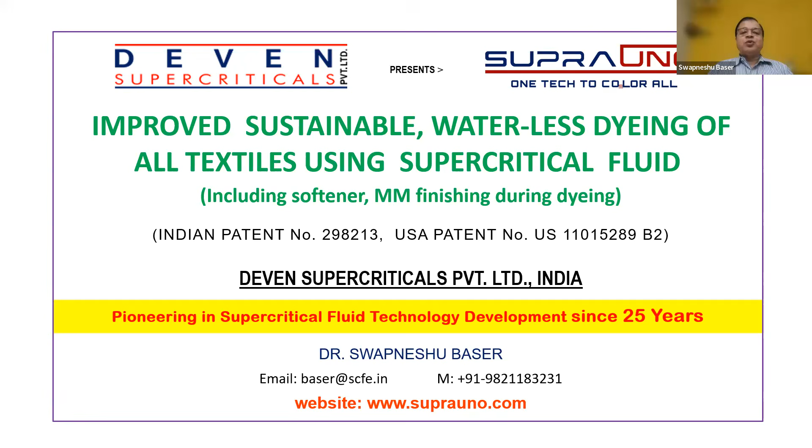Our company, as it was just told, is called Deven Supercriticals. So as you can see from our title, it has supercriticals in its name. We have been dedicated in the area of supercritical fluid commercially for the last 25 years, and on the research front, I have personally been involved for the last 30 years doing supercritical fluid processing applications and turnkey projects.

Deven Supercriticals is an innovation-driven company dedicated to world-class supercritical fluid processing for more than 2 decades. We are a spin-off company out of IIT Bombay, established in 1998, and we offer turnkey projects from pilot to commercial scale for various applications of supercritical fluids.

In the last 25 years, we have supplied around 26 plants, from small to big, in India and abroad, even to Europe, on commercial scale for other applications of supercritical fluids. And as mentioned, we have been granted a few international patents on different aspects of supercritical fluids, and dyeing of textiles is one of them.

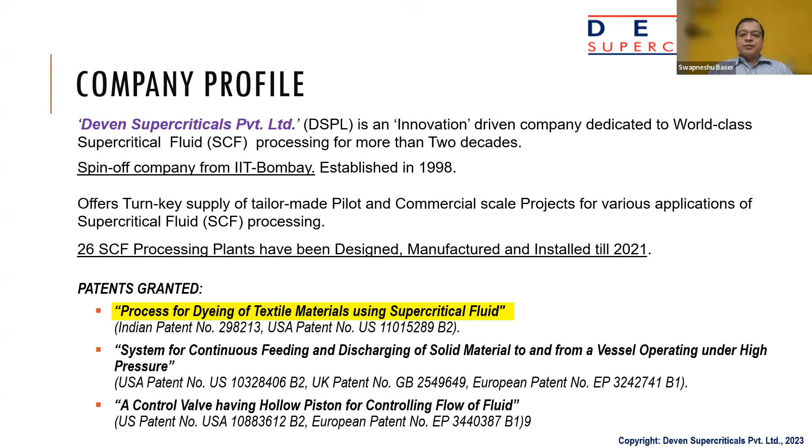So I'm really happy to share with you today our work in the area of dyeing of textiles in a sustainable way. We really need to focus on sustainability with a very wide and overall scanning, because today when we talk about sustainability, typically people talk about water and energy.

No doubt water and energy are important, but also the chemicals used in the process are actually playing a bigger role in affecting the sustainability of the environment as well as humans and animals. So unless we have all three aspects - hazardous chemicals, water and energy - being audited for any given application, the sustainability may not be complete.

As we know, chemicals typically, when they are getting produced at that stage at the origin, also produce a lot of pollution. During their transportation, there is an issue. During handling at the end user, and then subsequent disposal, again there is a lot of pollution issue.

So the bad name for the chemical industry and the textile industry comes more with the chemicals than water, because with water you can have zero liquid discharge technology and recycle most of the water. Energy also, you can tend to go for more environmental energies like wind energy, solar energy and so on. But for chemicals, there is no substitute as such which can be universally applied.

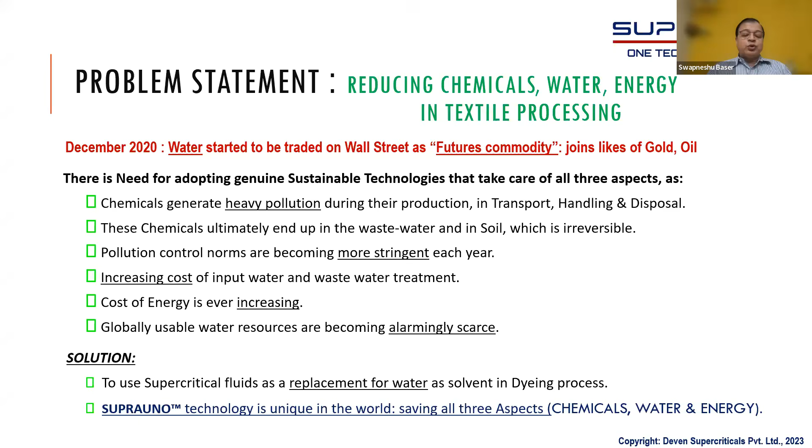Supercritical fluids are one of the contenders to replace water and also to save on energy and chemicals. Basically, a supercritical fluid can be any material above its critical pressure and temperature, and here we are talking about carbon dioxide. Why carbon dioxide? Because at supercritical state it will have a very high rate of diffusion, able to penetrate very quickly into the textile, significantly reducing the dyeing and processing time. Carbon dioxide is non-explosive, non-flammable, and generally regarded as safe - a GRAS solvent.

CO2 is also inert - it doesn't react easily with any material, so it will not damage the textiles or the chemicals used along with carbon dioxide in the process. And we all know carbon dioxide is termed a greenhouse gas.

But the carbon dioxide used for our process is not produced specifically for our application. We use carbon dioxide that is produced anyway as a byproduct from other bigger processes like urea production, fermentation, or bio-CNG production, all of which have carbon dioxide as a major byproduct.

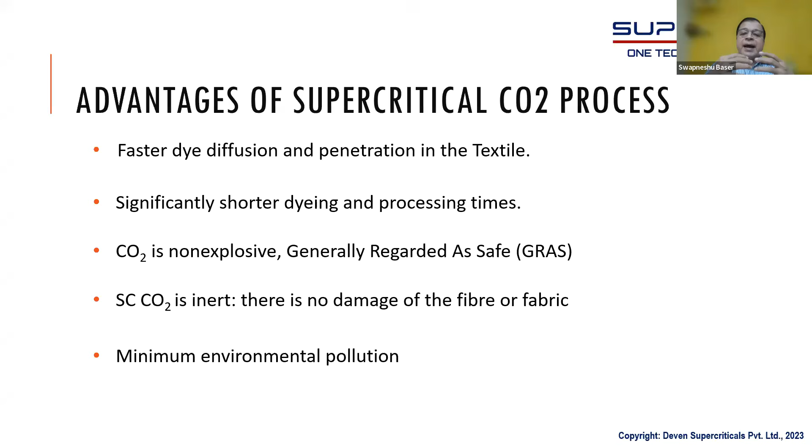So in effect, we become carbon dioxide neutral, because the carbon dioxide was anyway getting produced and was going to go into the atmosphere - we are just recycling it in our process. We are not generating additional carbon dioxide for our process.

The significance of critical temperature is that as we increase the temperature of a gas, we are giving more thermal energy to the molecules, so they vibrate more. Beyond this critical temperature, the thermal energy provided to the molecules is high enough that no matter how much you increase the pressure, the molecules will have enough energy to resist coming close together to form a liquid phase.

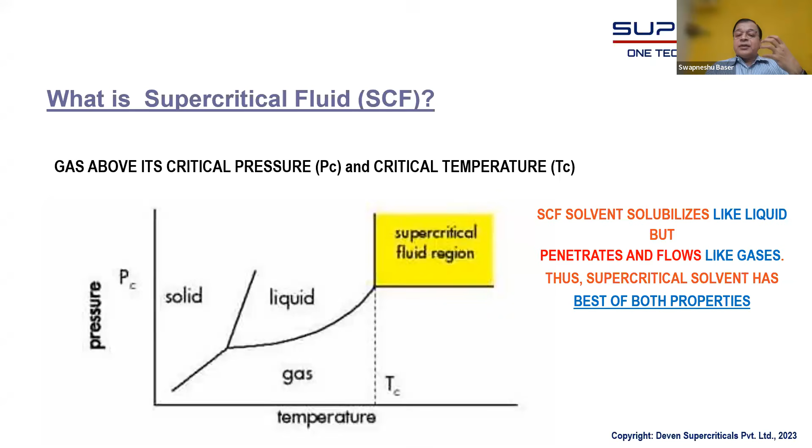But because we are increasing the pressure, the molecules become more and more compact. In loose terms, at the supercritical region - above critical temperature and above critical pressure - we have something like a high density gas. Because of this higher density, the supercritical fluid has solubility like a liquid, but because it's not actually liquid, more like a gas, it has properties to penetrate and flow like a gas, with very low surface tension. So you have a win-win situation - a fluid which can dissolve like a liquid but flow like a gas, with much less pressure drop and much better penetration. That's a real advantageous situation.

Now you can see that by small change in temperature and pressure, we are able to change the properties of this carbon dioxide in supercritical state in a very dynamic way. So right from 200 kg per meter cube to 900 kg per meter cube kind of density can be changed by change in temperature and pressure, or 0.2 gram per cc to 0.9 gram per cc. And this good amount of change in the property of the supercritical fluid by selecting the correct pressure and temperature will give rise to different applications, suitability of carbon dioxide to be used in supercritical state for various applications as a medium.

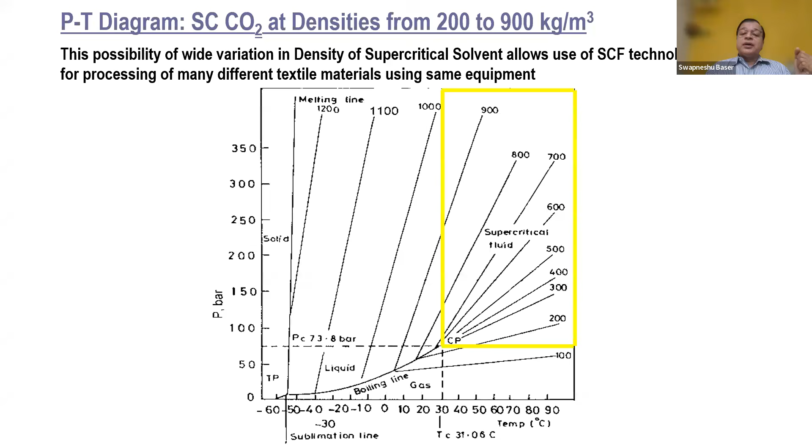Let me tell you that even in 1997, in Germany, I had visited one trade fair called ACHEMA in Frankfurt. So even in 97, the same kind of prior art technology was demonstrated at ACHEMA by a German company with a working pilot scale plant, where they were talking about the same concept and only possibility to dye polyester and use of special dyes, which till recently was being talked about as a limitation.

And that's where we have come out with an innovative solution, trying to remove the limitations from the prior art process. But just to give you an idea about what was involved in the prior art process is, now we need to go to the supercritical state by increasing the pressure.

So we use the pump to increase the pressure above critical pressure, and then we use a heat exchanger to increase the temperature of this high pressure liquid CO2 to have carbon dioxide above its critical pressure and temperature as a medium or a solvent for us.

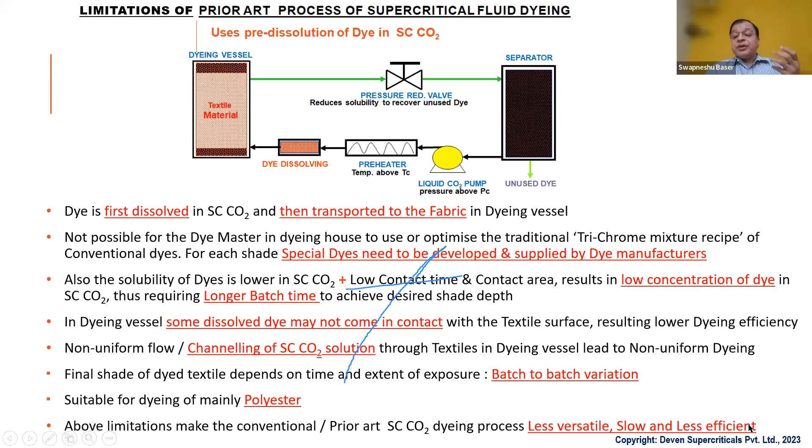So what we do differently compared to prior art, I can explain with this diagram, using the analogy of sugar. If you take a chunk of sugar and put it in water, it will take time for the whole sugar to dissolve, with a lot of stirring. Whereas if you take the sugar, powder it, and put it in water, it will dissolve instantaneously.

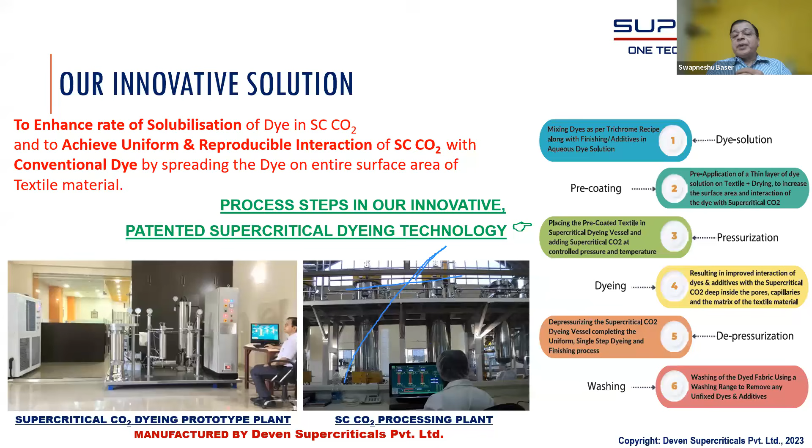It's already there on the surface and it actually gets penetrated inside. By doing this, we have been able to remove the limitations of the prior art technology, which is available with other countries and other suppliers.

Our SUPRAUNO process can now be used for dyeing of polyester as it was done before. But apart from that, we can now dye cotton, linen, flax, viscose, polyester cotton, polyester viscose blends, nylon, acrylic, wool, etc., without using water, with supercritical CO2, and we can use the respective dye.

That means for polyester we can use disperse dye, for cellulose we can use reactive and direct dye, for nylon we can use acid dye, for acrylic we can use cationic or basic dye, which is the conventional dye, and we can also use the in-house trichrome recipe.

Like for example, for our exhaust process or soft flow process, or for continuous process with water, whatever trichrome recipe we are using with the conventional dyes, we can use a similar trichrome recipe with the same dyes and do dyeing without using water with supercritical CO2 by using our SUPRAUNO process.

So we have been able to achieve now very good solubility of the conventional dyes in supercritical CO2. We have better efficiency of dyeing, which we can see in the next slides. We also have the possibility of doing finishing along with dyeing.

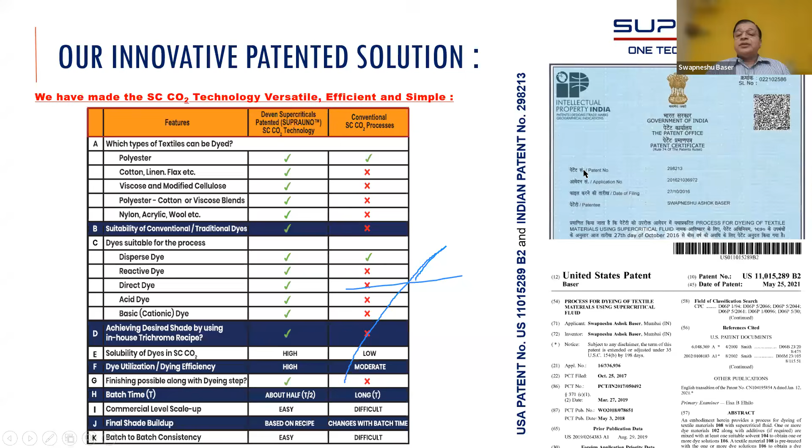And for this, we received our patents in the US as well as in India. And we are a proud indigenous Atmanirbhar technology today available for the world.

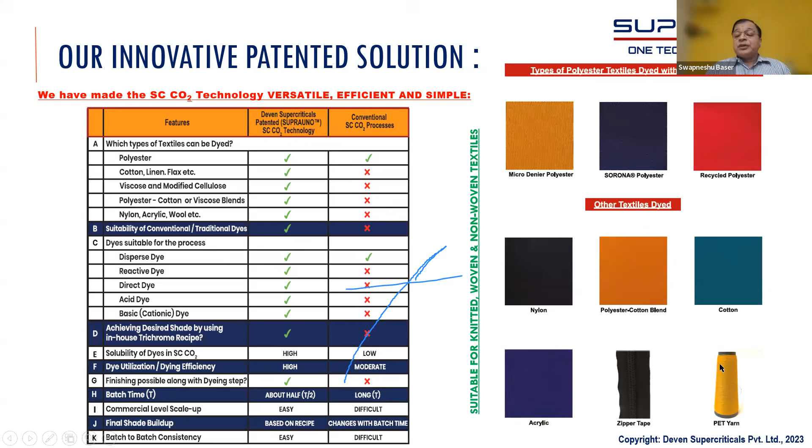We will see in the next slides different applications which we have already done, like polyester, nylon, polyester cotton blends, cotton, and other types of materials, even like zipper tape made out of polyester and yarns. Now here, one example we can see about the efficiency of our process, where we took recycled polyester and used a conventional disperse dye.

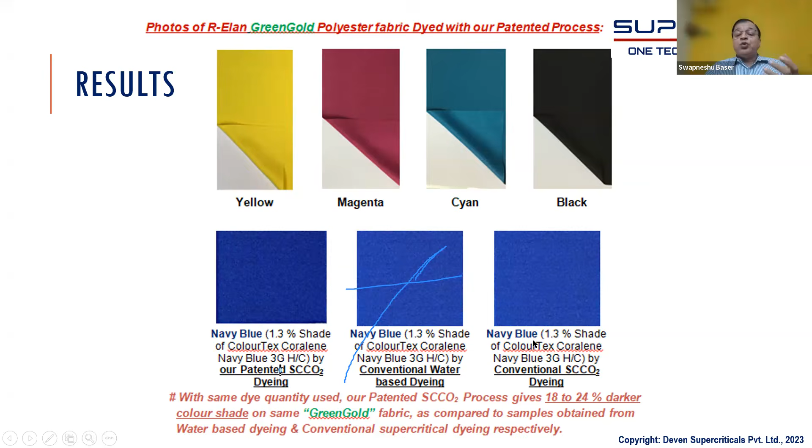Used the conventional disperse dye called Coralene from ColourTex, and at 1.3% dye with respect to the weight of the fabric, we got a particular depth of color. The same dye on the same fabric was dyed using the conventional exhaust process at a lab with ColourTex, and we saw that we got much lesser depth with the same dye, same concentration. With the conventional CO2 process, the prior art process, they also tried, and they got around 18 to 24% lighter depth in the shade.

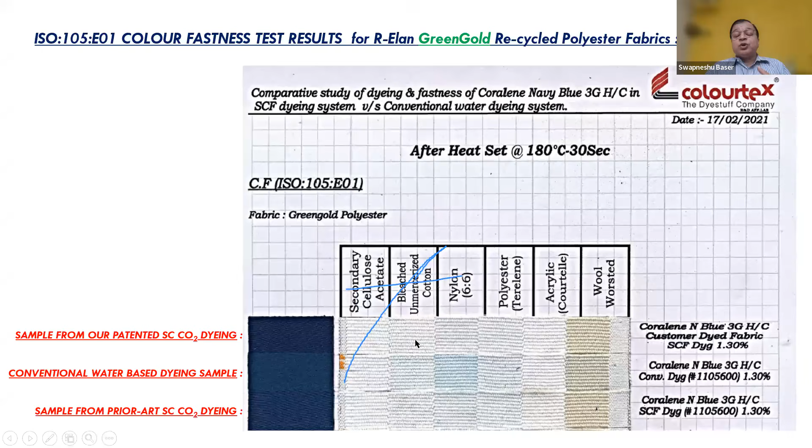So as compared to our sample, we got around 18 to 24% less depth with the conventional process. But here you can see that even though we got higher depth — the first one is our sample, the second is with water dyeing, third one is with conventional CO2 dyeing — even with higher depth, we still got even better wash fastness. So the performance has not decreased, the efficiency has improved, and performance is also very good as compared to even the conventional process for which the dye was made.

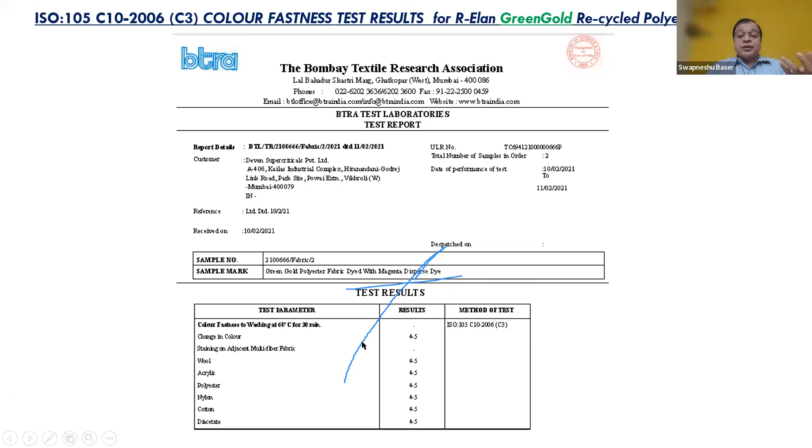And similarly, we have done testing with other fabrics, with labs. This is another interesting example where we have a fabric called Sorona, which was initially developed by DuPont. This particular fabric has one monomer that is from a polyester, but the other monomer is from starch or a natural source. At DuPont's lab, they used the Dystar dye, conventional Dianix dye, which is a disperse dye. They had to use 3% concentration to get a particular shade. We could use the same dye on the same fabric, but with 2.1%, we got a similar shade.

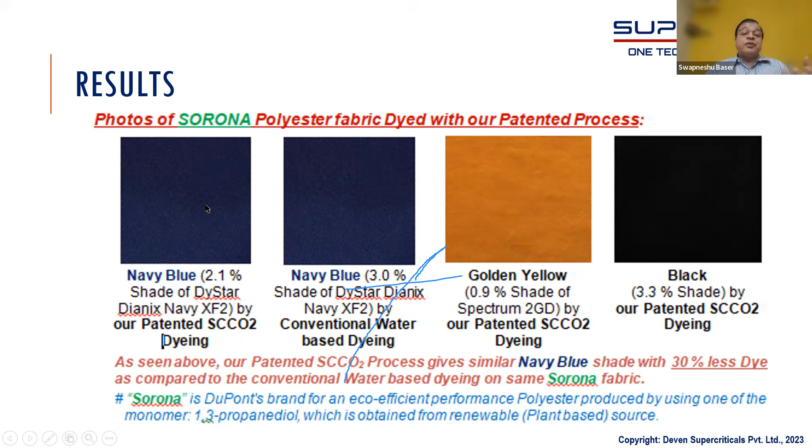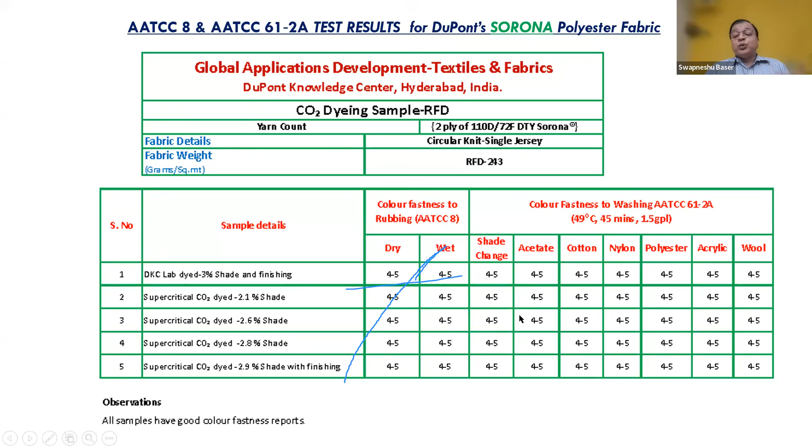That also shows the efficiency of our process. And when they tested the performance, that is the rubbing fastness and the wash fastness, they found that it was comparable and excellent as compared to the conventional process also.

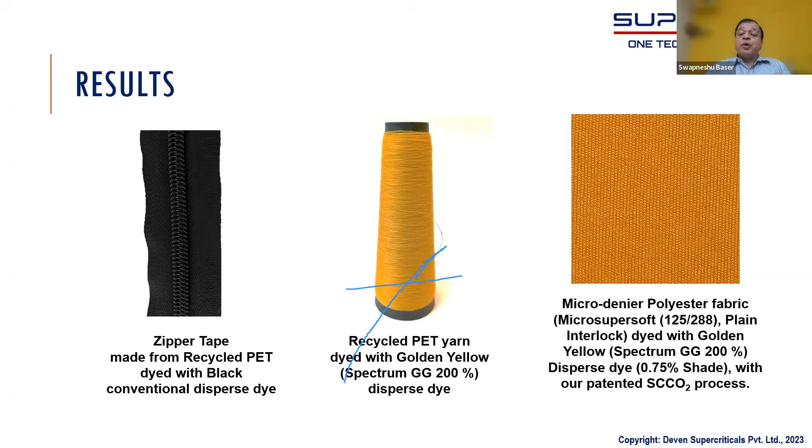As I said, we have done other types of textile materials like zipper tape and yarn. This is a microdenier fabric from polyester, where the high surface area due to microdenier nature of the yarn makes it difficult to dye in conventional method, requiring high quality dyes. Here we used a very normal type of dye from a company called Spectrum, and still we could achieve a very good uniformity in dyeing because of our process.

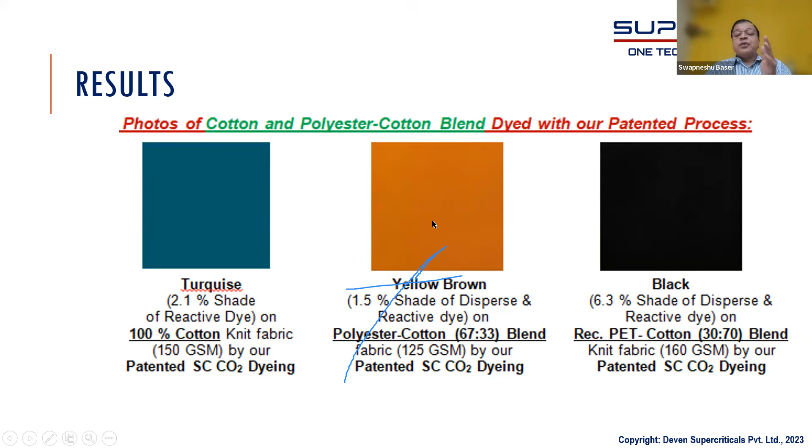With our Supra Uno process for polyester cotton, cotton polyester, or viscose, we can use single step dyeing. We were part of the Fashion for Good innovation program, and through this program we were introduced to different brands and textile mills who gave us the task of demonstrating the technology for their products.

Adidas had given us a fabric which had 70% cotton and 30% polyester, and they gave us the swatch from their conventional supplier who was following the 2-step process, as I explained, dyeing the polyester first and then doing reduction clearing and cellulosic dyeing with salt.

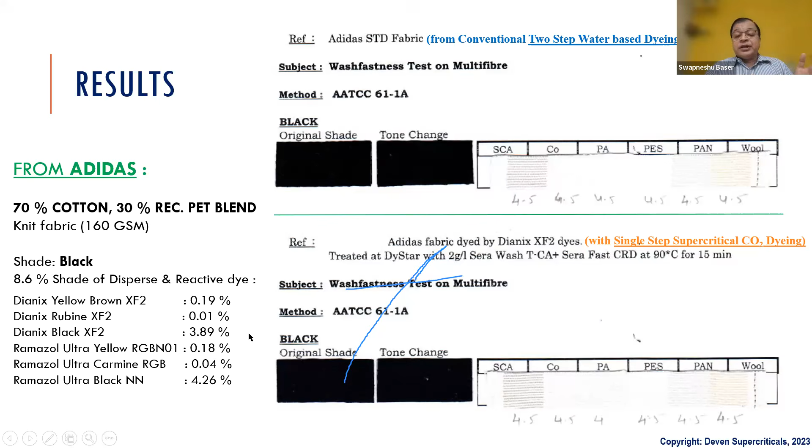They gave us the requirement of a particular performance in terms of washing fastness, and we could actually use the conventional dyes. These are the disperse dyes from Dystar, and these are the reactive dyes from Dystar. We used it in single step, all 6 dyes together, without any reduction clearing in between, because it's a single step process, and without using any salt.

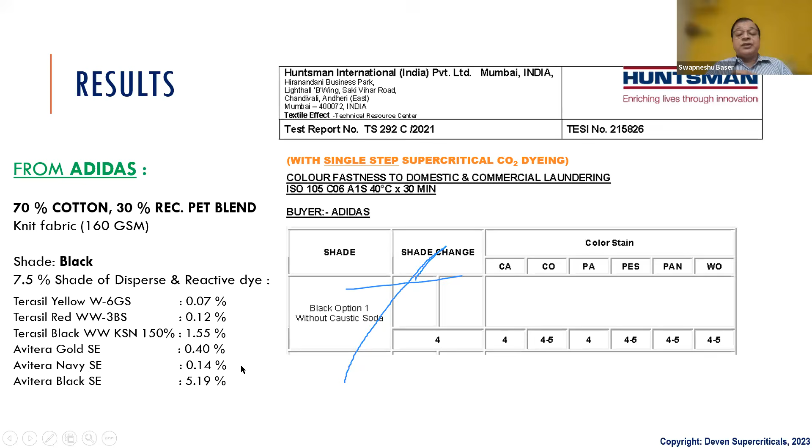We could match the shade and we could match the performance. And it's not specific to a particular dye. We could achieve the same results by using Huntsman dyes - these are the disperse dyes and reactive dyes. And for a particular recipe, we could achieve the results with a different recipe also.

Similarly, for the same project, we got a sample from PVH, which is another brand, and they gave us a cotton polyester blend with elastane, 5% elastane, from their supplier, which was with a 2-step process. We could again match the shade and the performance in a single step.

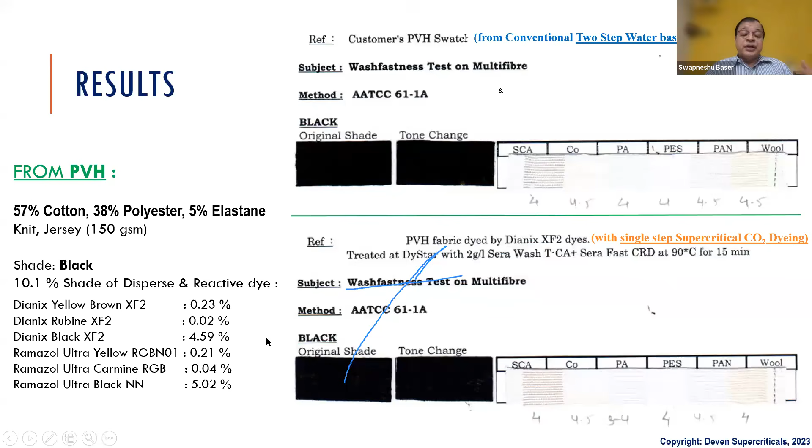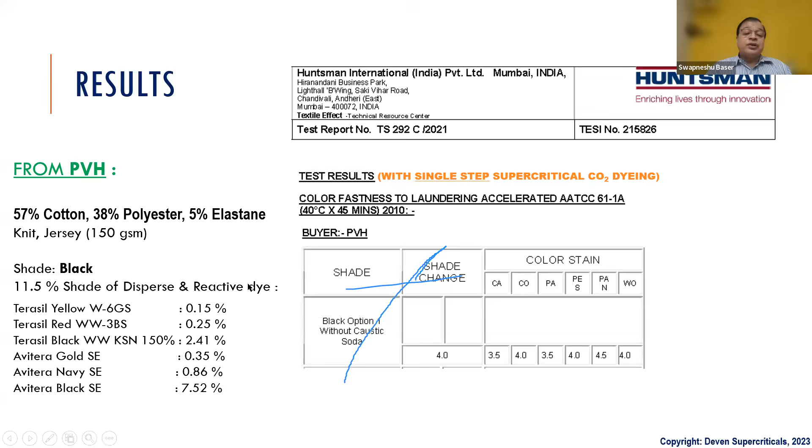Just to give you an idea, here it might be taking 8 to 12 hours with a lot of chemicals, and here we are taking not even 2 hours, and we are able to get it in single step. So again, here we did the work with Huntsman dyes to show the flexibility of our process, that we don't require any special dyes as such, and we are using the same dyes.

Dr. Baser? Yeah. Dr. Baser, I'm sorry to interrupt you. I am sure, I don't know how long your presentation is, but there would be questions. We'd like to give some opportunities for questions. So if we can, give me 10 minutes and I'll finish. Is it okay? All right.

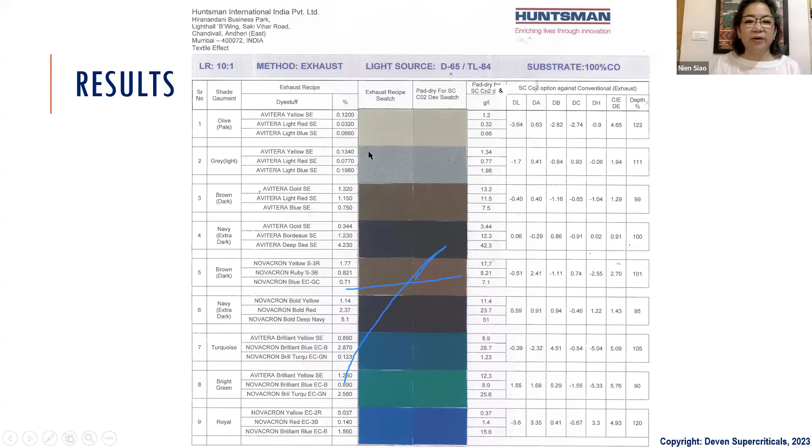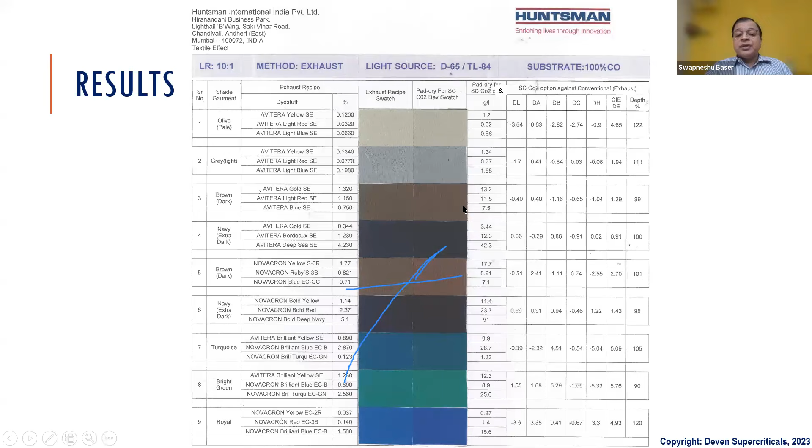This is an example of cotton dyeing, where we have used the conventional reactive dyes from Huntsman. This particular column shows different shades by a particular recipe, and here they have used salt and conventional exhaust dyeing. We use the same recipe but with supercritical CO2 without salt, and we could achieve equivalent shades and equivalent performance as well.

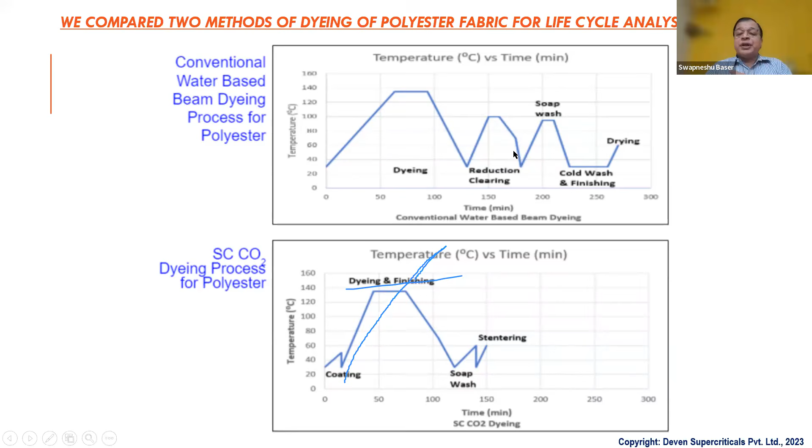We have done some life cycle analysis. We compared our process with the conventional beam dyeing process, because we also make a beam and put it into the supercritical CO2 dyeing vessel. If you compare it with the conventional beam dyeing process, you can see that the conventional process has more number of steps, so it takes longer time, and we take shorter time. There are more chemicals going in, and we have less chemicals.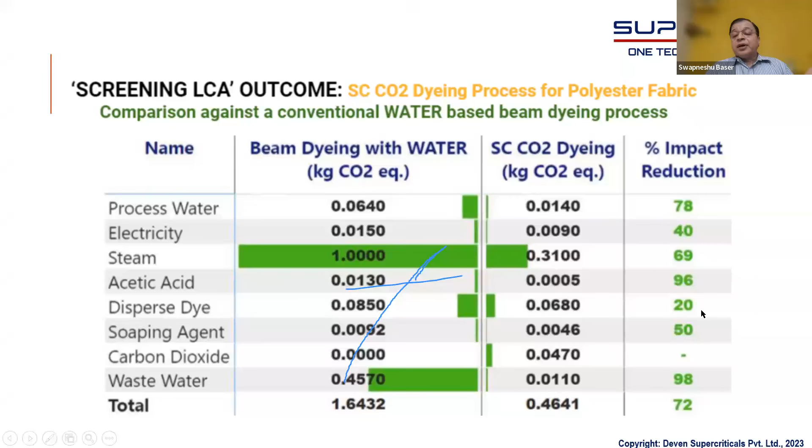In conclusion, you can see that the reduction in impact in terms of water-based dyeing: we have 78% reduction for water, 40% for electricity, 69% for steam, and for auxiliary chemicals and wastewater there is a significant reduction.

For polyester cotton, as I said, these are the conventional methods for exhaust dyeing with two steps, pad dry thermosol, pad steam with conventional for two steps. And this is SUPRAUNO with a single step.

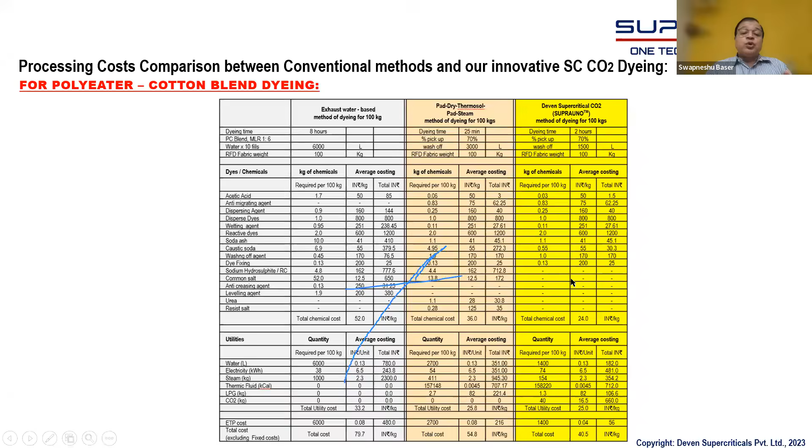We are actually reducing the chemicals tremendously. So if you see here, we are using as much as 90% less chemicals for polyester cotton blends. We are using 51% less energy, 77% less water, and 70% less time.

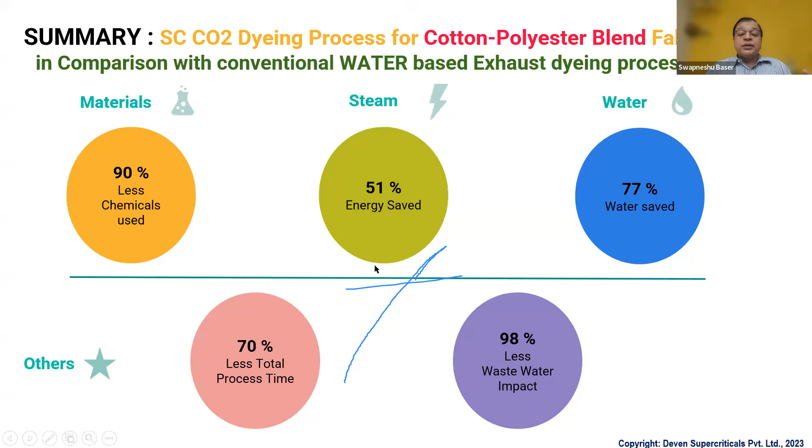When you compare the cost of production, comparing the cost of chemicals, utilities, water treatment and fixed cost, because we are saving a good amount of chemicals, our SUPRAUNO process is not very expensive, so the user can still give the product at a similar cost even after using a highly sustainable process.

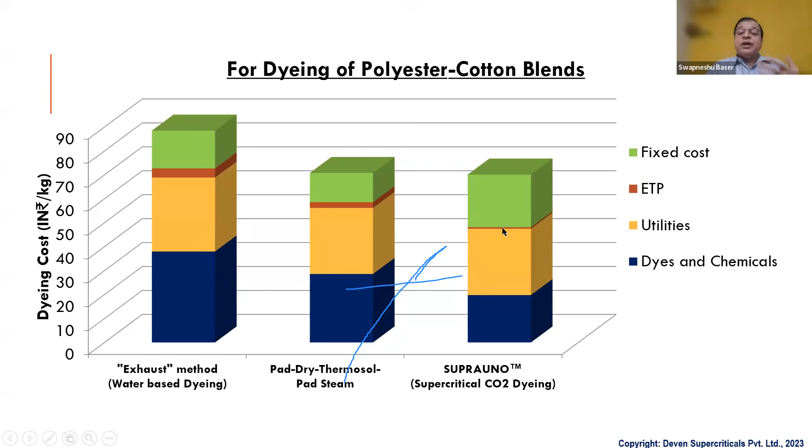And this is not for zero liquid discharge, this is normal processing. But if you go for zero liquid discharge, which is the requirement today, the cost of effluent treatment will go up even more, and then it will become even more attractive because we have 90% less chemicals to start with.

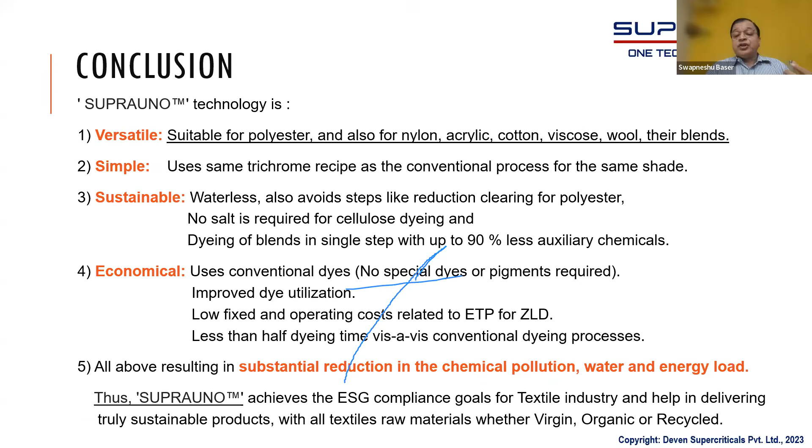So in conclusion, I can say that we have a very versatile, simple, sustainable and economical process, and we can genuinely reduce the chemical pollution and use of water and save on energy using the process as I have explained. Basically, this is what I had to say.

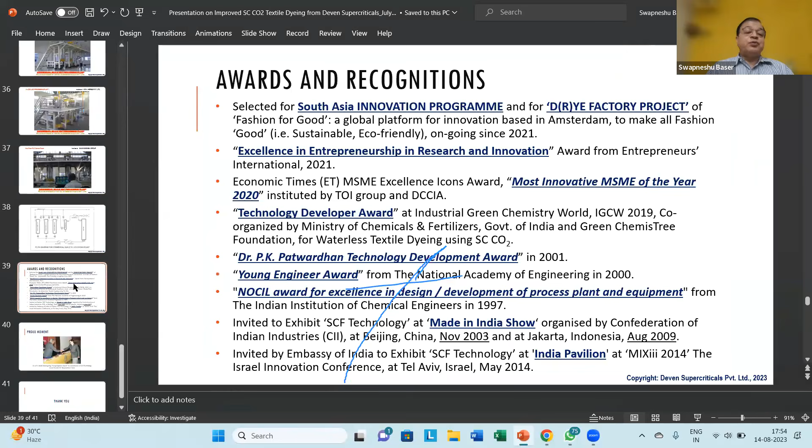Just to conclude, we have received a few awards along the way since last 25 years, and this is something very dear to our heart and we are very proud to have received it at the hands of Dr. Abdul Kalam for our technology day.

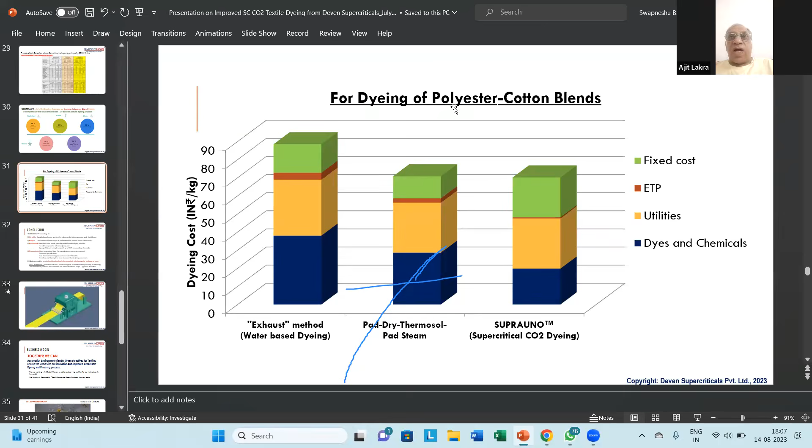My last question, sir, if you allow me. I'm from Ludhiana, and I offer myself to be the first to install your technology. I would like to put up one machine, maybe of 400-500 kilo capacity. My point is, is it scalable later if I'm satisfied? For the first one, I'll be able to show it to any of your prospective customers here — it's a very big potential market. So I would like to have some special concession as the first buyer from Ludhiana. Your comments about this, sir?

We definitely see — I respect what you're saying, and for the same reason we've been doing trials for the industry for the last 3 years. We have done more than 1,000 trials, and today a lot of the industry is very happy with the results, because what we do is take your fabric, your dyes, your trichrome recipe, and do it without using water. So you get an exact apple-to-apple comparison. If I use some other dye or fabric, you won't know what I'm doing. So you're welcome, we're always open — you can see our background.

For the last 30 years we have invested in state-of-the-art technologies. When I started at IIT Bombay, when we started this company, we got a lot of awards but no purchase orders. So we have the experience of making the technology successful. Our commercial scale plants have been running for the last 20 years.

No doubt, this is a wonderful technology and it's going to create a revolution, because in Punjab, in Ludhiana, we are in the black zone of water. So water has become a very big problem — the treatment as well as the availability of groundwater is also a big problem.